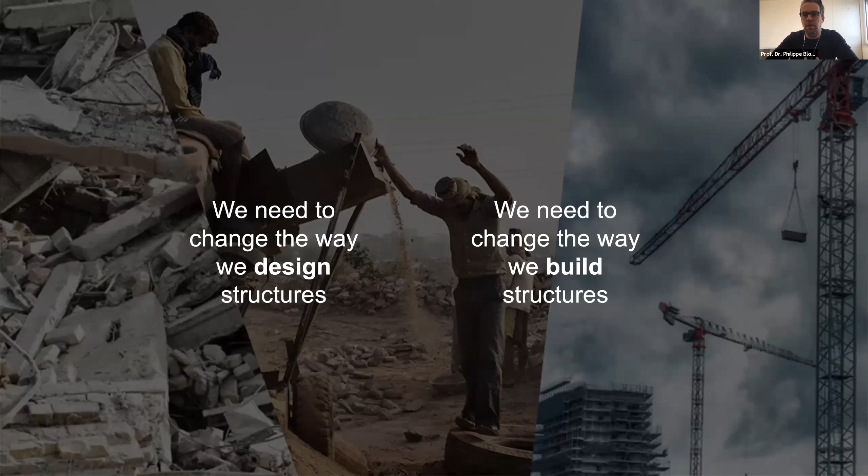So zooming out, national centers are national endeavors indeed that really want to promote long-term research with high risk and high return. Particularly the NCCR Digital Fabrication is trying to really question and investigate to what extent computation, the integration of digital technologies, can really disrupt architecture and construction indeed.

We started in 2014. We work in phases, so currently we're finishing the second phase and are getting ready to start our third phase in 2022, so to go all the way to 2026.

The leading house is ETH Zurich, but all key institutions and many of the universities of applied science in Switzerland are collaborating on this massive endeavor and challenge that we're facing. What's really nice about our NCCR is that we managed to gather experts in all fields that we consider key to tackle these challenges.

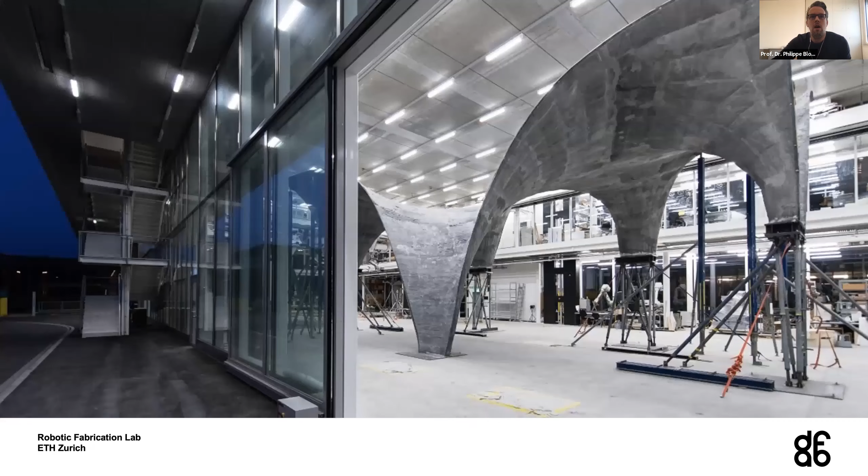There, more specifically, we're in the Institute of Technology. This is our building. It's called the Arch Tec Lab, which has a quite unique roof. The roof is actually robotically assembled. It's actually a prime example of scaling up research.

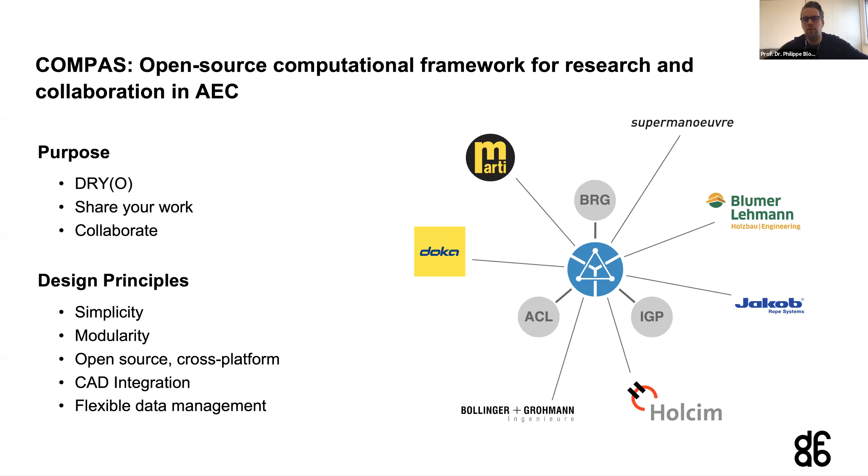And then last but not least, this is Grand Challenge 4. We are thinking about digital collaboration and how, through COMPAS, we can learn from what we do, but also fully understand the socioeconomic impact of all the technologies being introduced. We are a large group of researchers keen to work with all of you. That's the Digital Fabrication NCCR.

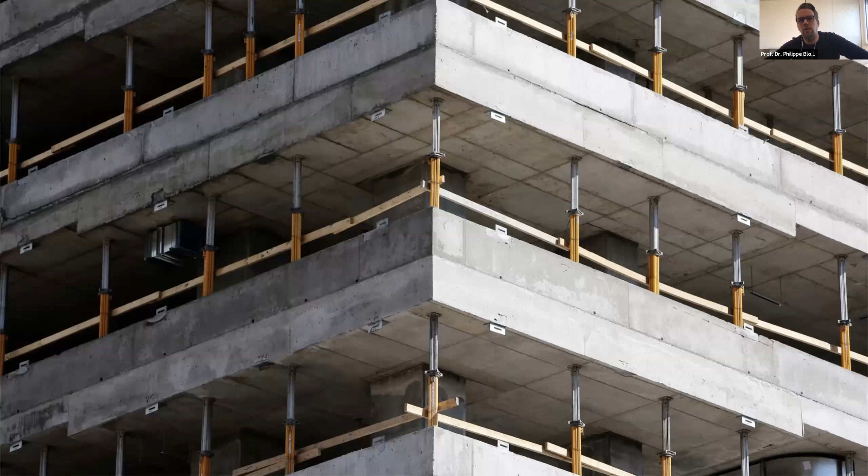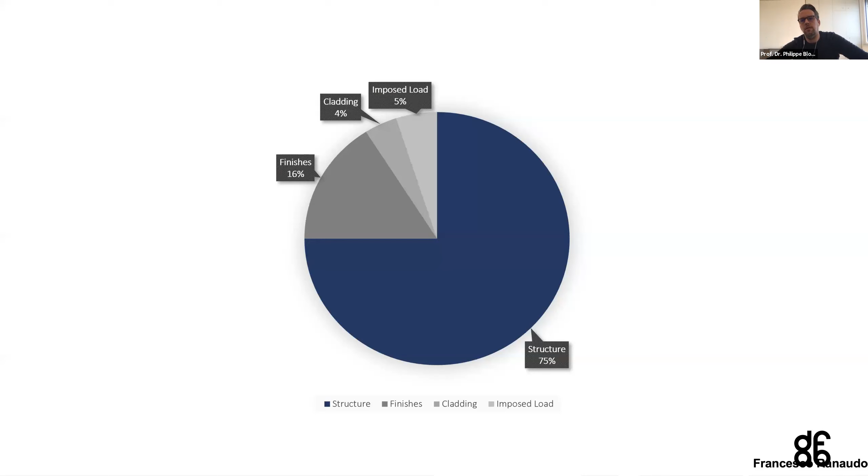Now, maybe 2 minutes to give insight on one project from my own research group. We're trying to tackle the most wasteful structural element in construction, which is the floor. Did you know that in medium high-rises of 15 to 30 stories, like you see all over China, 75% of these buildings' weight is in the structure, and more than half of that weight is in the floors.

So what we do is bring back historical principles of compression to significantly reduce the mass and volume needed. These principles are not new, they come from historic structures. That allows us, for example, in a 5 by 5 meter floor plate, to only need 2 centimeters of unreinforced concrete placed exactly where it needs to be.

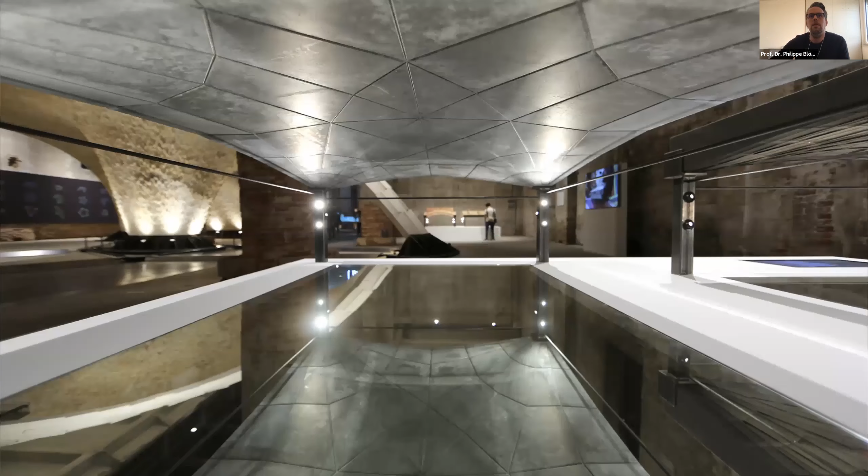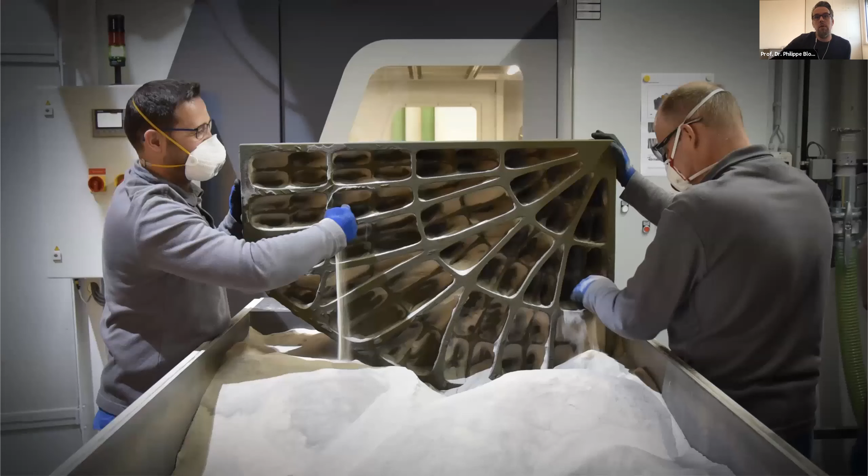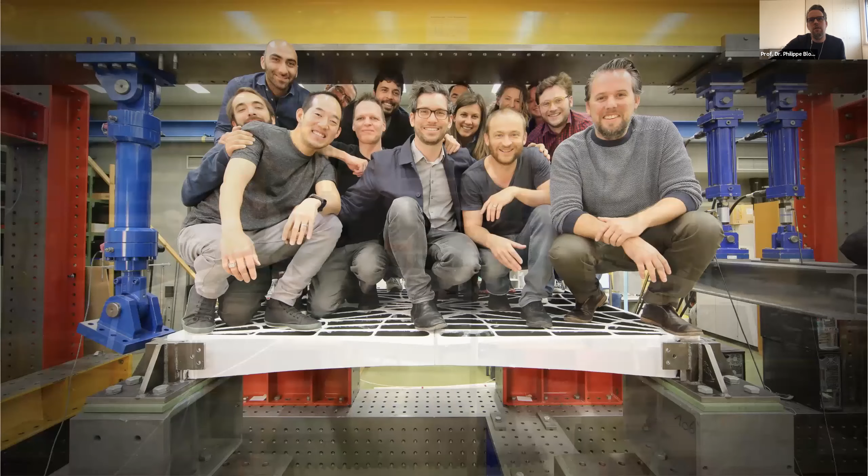This is where digital fabrication becomes extremely important, because in order to shape these non-standard structural geometries, we need new ways to fabricate them — for example, direct 3D printing. In this case, this sand 3D printed floor serves as a large-scale prototype to show that with super weak, simple, low embodied energy, low pollution materials, we can generate a floor that is structurally stable. If you don't believe me, this is 1.5 tons of ETH nerds standing on a very thin 2 centimeter structure.

The reason we do that is indeed to reduce volume, but most importantly to reduce the embodied carbon, to use as much recycled content as possible, and to be 100% recyclable at end of life if you don't just reuse the building.

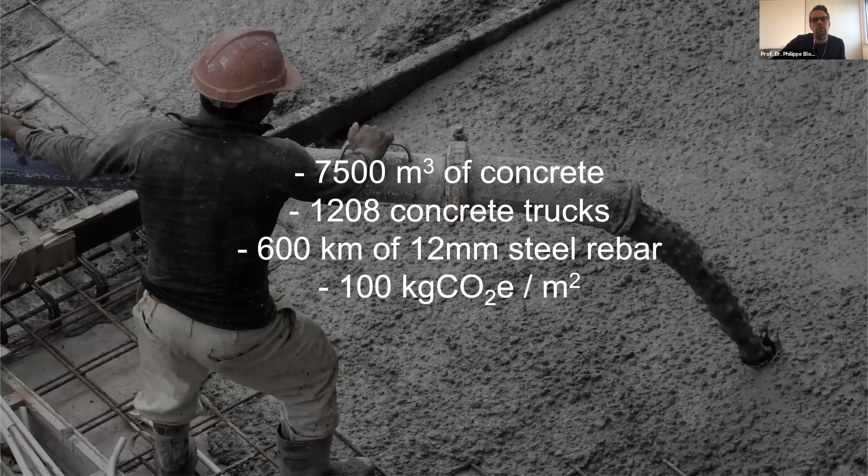What's exciting is that if you apply this to any of the medium high-rises around us, this would reduce the amount of concrete needed by 7,500 cubic meters for one building. Equivalently, this would mean 1,200 fewer concrete trucks needing to go to these building sites. So that's why we're excited about pushing these small innovations.

What is more boring than just a floor that we all walk on? But if you know that all these floors together amount to more than 40% of the mass and weight of these buildings — so 40% of the pollution — then I think it's worth questioning how we build, and introducing digital fabrication to do significantly better. So with that, my short introduction. I look forward to this discussion later, and thanks again for this opportunity.

Thank you, Professor Bloch, for the interesting talk.

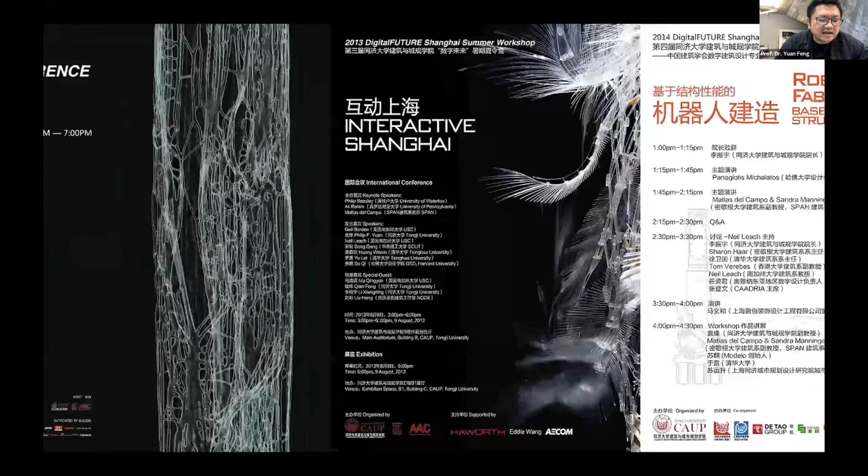In the past 10 years, we have successfully invited a number of prominent educators from the leading schools of architecture and architecture associates to join and contribute to the series of events.

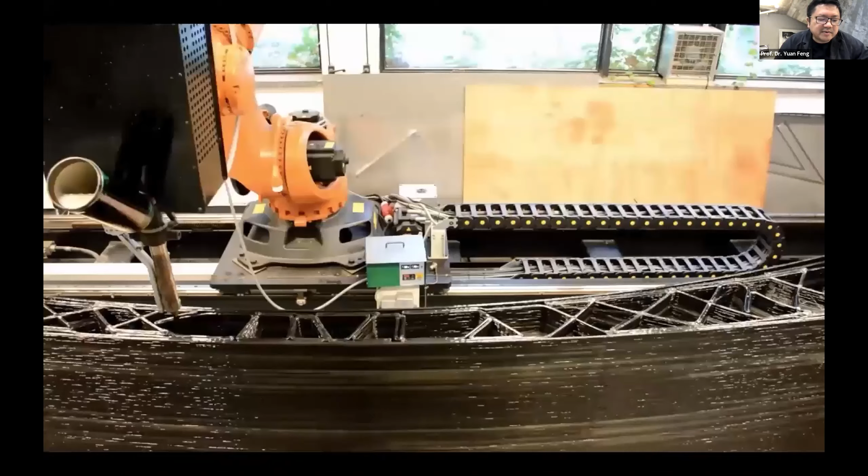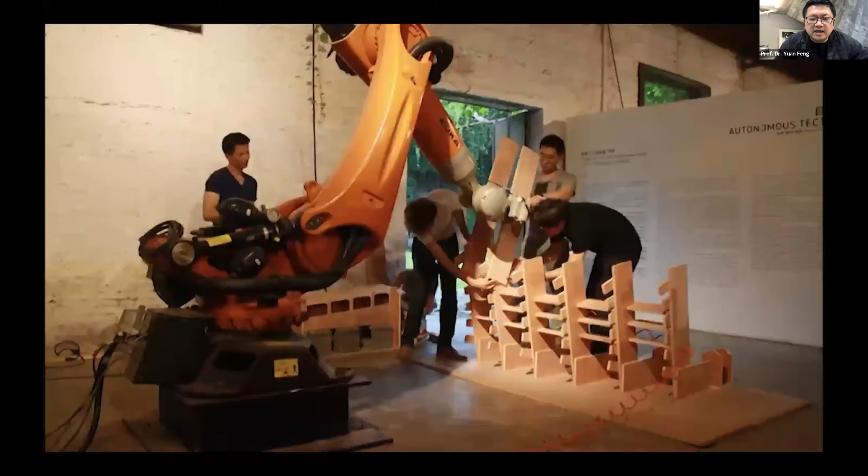Every summer, we had an exhibition to showcase the outcomes of the workshops. Here is a glimpse of all the installations, artworks, experimental prototypes, and exciting projects which the Digital Futures series of workshops has created. I think it's quite diverse, a dialogue cross-country, and also a very meaningful process for everyone to learn from each other.

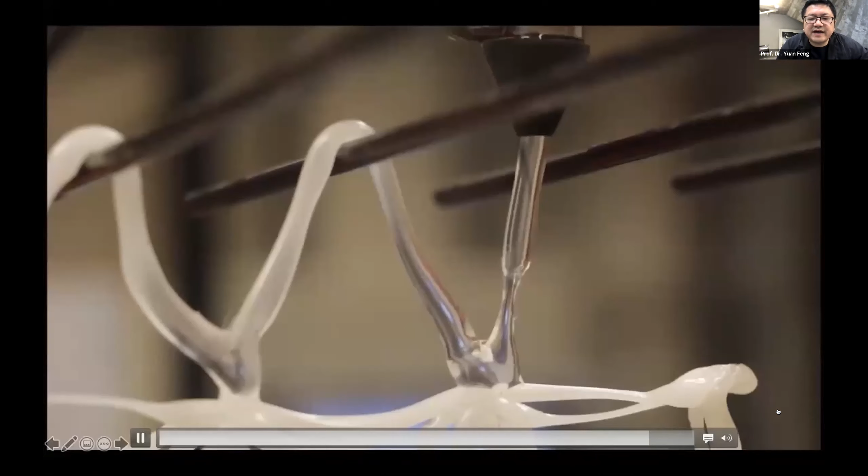It's quite cross-discipline, including fashion design, material science research, computational design, and digital fabrication as well.

Digital Futures launched with a manifesto calling upon leading architects and architecture educators to give their time for the benefit of everyone across the globe. The response was astonishing. Educators from leading architecture schools in the world came together in a gesture of solidarity to offer students from all over the world, including those unable to afford the fees of the top architecture schools, the kind of educational experience that otherwise they could only have dreamed about.

The initiative was highly significant for many reasons. Not only did it succeed in showing that online workshops could be as effective, if not more effective, than face-to-face workshops, but it also made a significant step in helping break down the walls of the classroom and democratize teaching in different ways, especially in architecture education.

Here you can see the statistics of the number of applicants from the year 2011 to 2020. It is obvious that Digital Futures had attracted progressively growing numbers of applicants throughout the world. Last year, the applicants reached their peak.

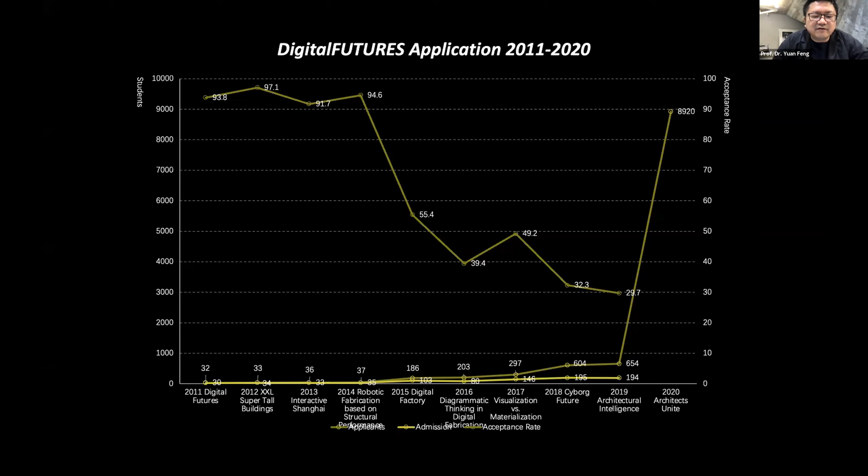Despite the pandemic, it has been quite possible to conduct Zoom meetings, to use contactless payment, and order groceries online. The new situation pushed people out of their familiar habits and forced them to adopt a new digital lifestyle.

Digital Futures has an education platform linking universities and institutions around the world. The initiative has expanded its partnerships and maintained long-term collaboration with a number of leading institutions, including ETH Zurich, IAAC, University of Stuttgart, Harvard GSD, MIT, SCI-Arc, RMIT, AA, UCL, and so on.

Over the past few years, we have had a lot of outcomes, including publications, and Digital Futures gradually grew in status. A series of books was published as part of the Digital Futures event, parallel with the event. We co-authored these with Professor Neil Leach, Professor Achim Menges, and Professor Philip Beesley, and this sequence of books has actually educated a generation, helping them learn or engage with computational design and robotic fabrication culture.

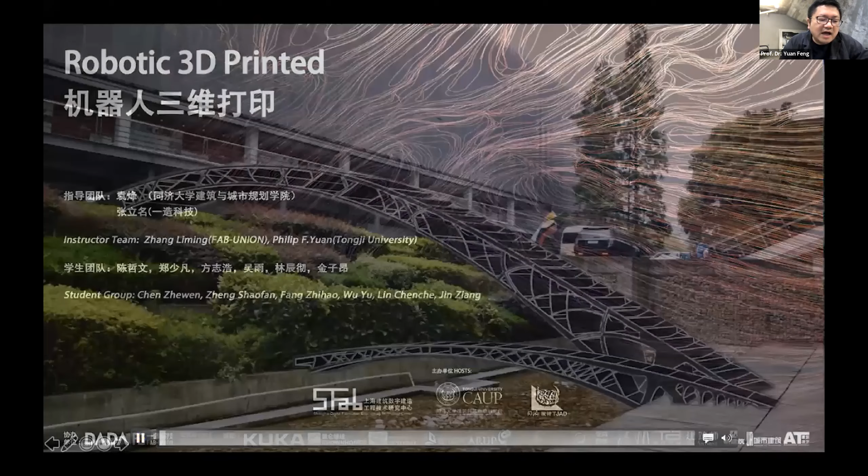By the end of this presentation, I would like to show our 4 different research projects from my team that supported our research process. Since 2017, the pedestrian bridge has been our team's prototyping object, testing different materials integrated with novel fabrication technologies.

In 2017, we experimented with 3D modified plastic printing technology, testing it in our school from the ground floor to the basement, around a 40 meter span, and in a small village around a 6 meter span. It was totally made by plastic printing, around 1.5 tons, and can stand 5 people on it.

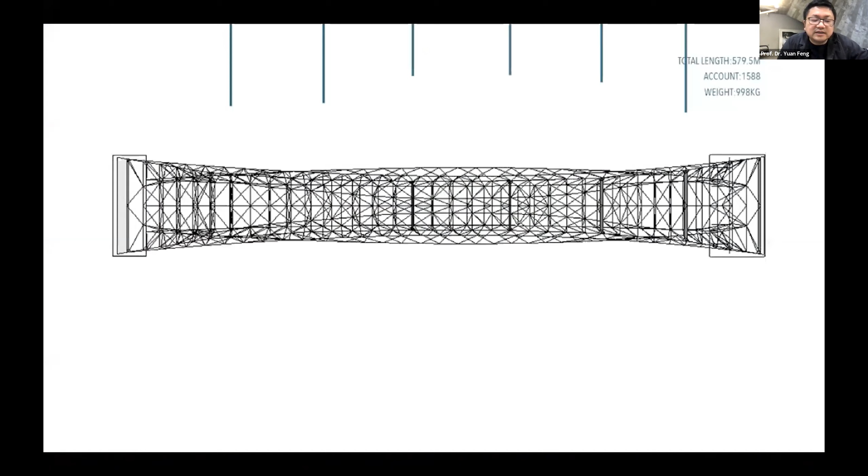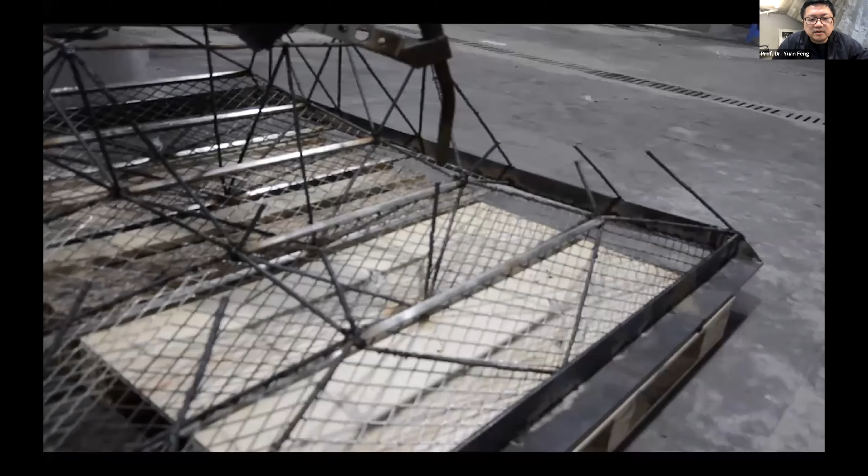The second year, 2018, we tried wire arc additive manufacturing technology with steel. It was designed with different components, welded by robotics point by point. This is the welding process by the machine. From 6 different parts, we assembled them on site. In the second year, we could stand 7 people on this 1,000 kilo bridge.

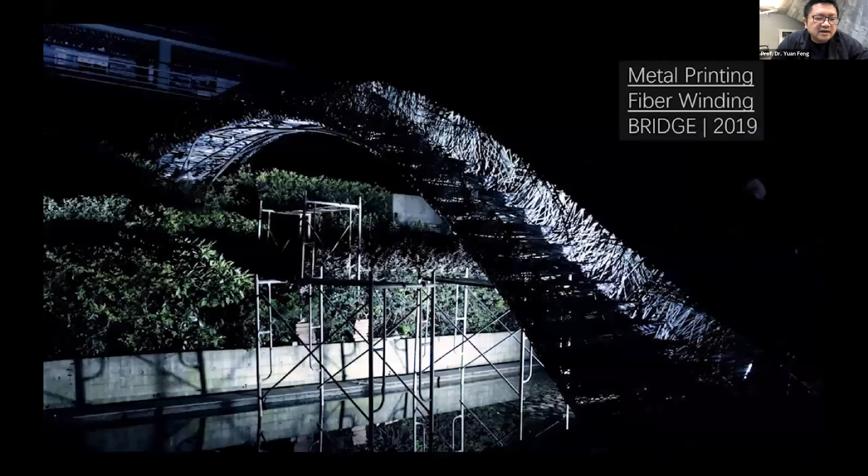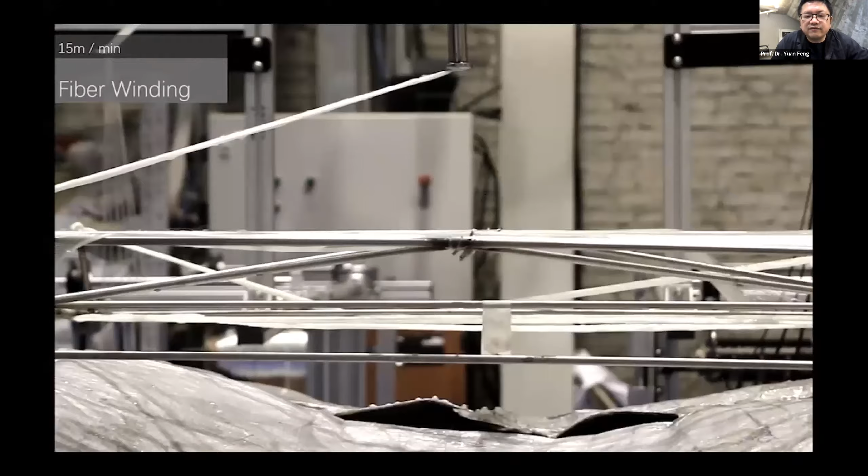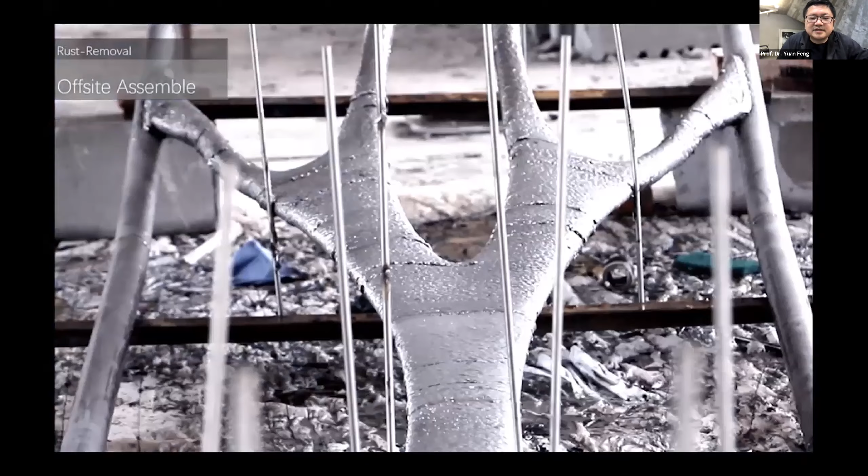Then time goes to 2019. It was our first attempt at a hybrid approach, combining metal 3D printing and fiber filament winding technology, including carbon fiber and glass fiber, which showcased compression and tension, different kinds of forces on the same bridge. Everything is done by the students. I think it's a learning process from computational design and robotic fabrication, finally leading to the assembly process.

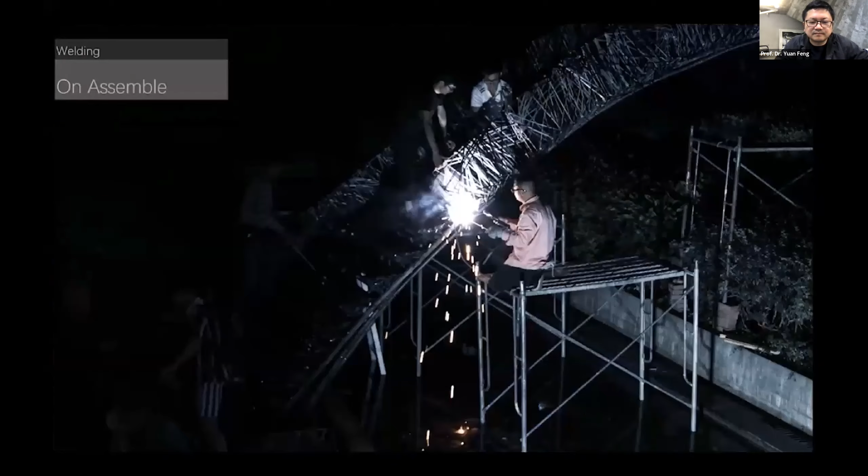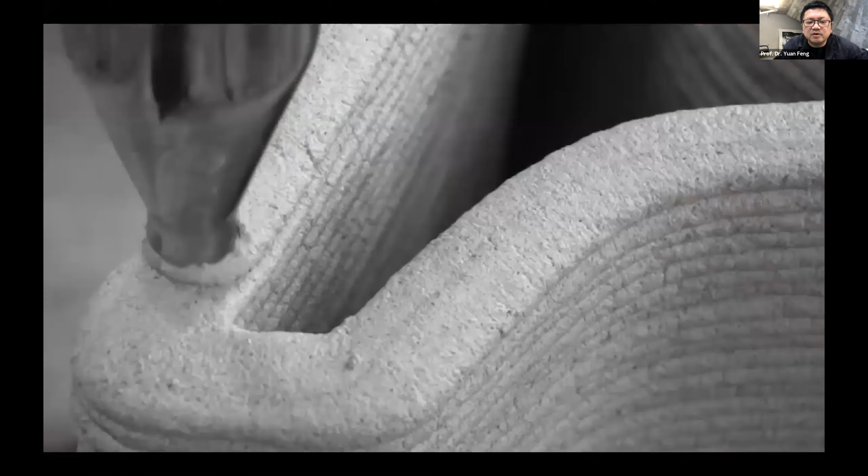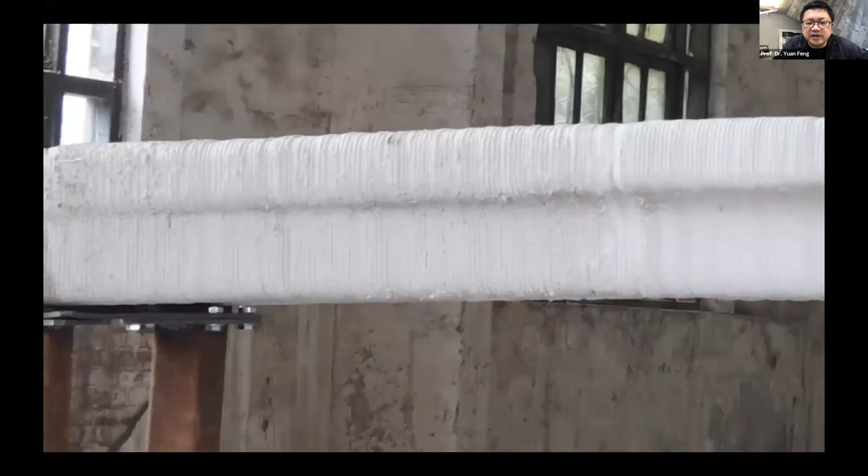That's a brief introduction to what my team engaged in over the last 3 years. Last year was a little bit influenced by COVID-19, so we made a smaller bridge using 3D concrete printing. Most of the students were online; only 4 or 5 team members stayed in the factory working on this 3D printing process. But it was a good test with the learning process, engaging with material performance and learning how to generate different forms using different tools.

So that is my speech. I'm looking forward to the discussion after the keynote speakers. Thanks a lot, and I'll give the floor back to Libing.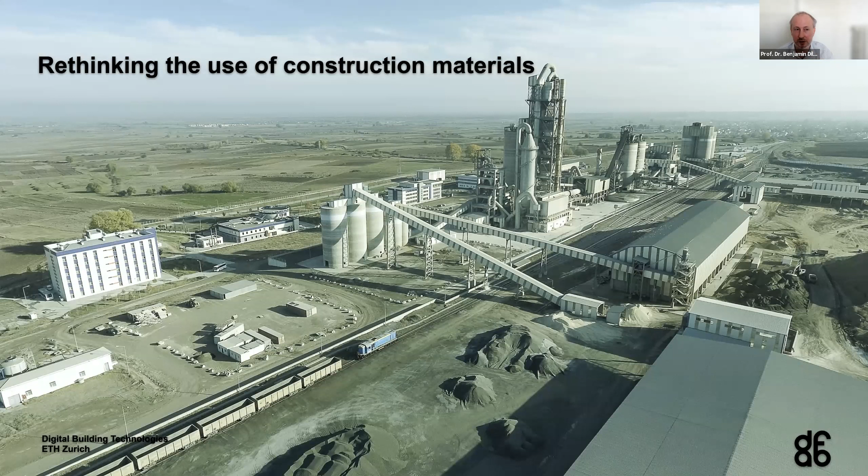As Philip mentioned in his previous talk, we have to rethink the use of construction materials. We also should rethink the way we fabricate buildings, rethinking modes of prefabrication and on-site fabrication to avoid a monotonous architecture that isn't accepted by the population. And we should rethink building elements. Can we move beyond industrialized, standardized fabrication methods? How can digital fabrication methods influence our building elements?

We can look at examples from highly optimized elements like we know from the car industry. But of course, there's a big difference: cars are manufactured millions of times in the same way. The big challenge for us is, can we manufacture buildings with the same precision and optimization routines, but in a non-standard way?

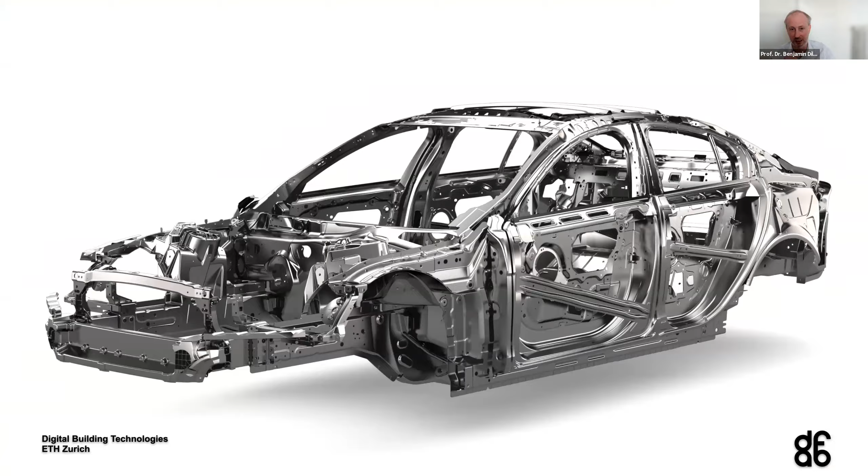Can we use fabrication methods as we know from the car industry, for example robots, to bring to architecture an automated additive manufacturing method, fully harvesting the potential of completely digital manufacturing routines? Our research is hosted in the NCCR DFAB, the National Competence Center of Digital Fabrication, and our laboratory is the Robotic Fabrication Laboratory, a very large-scale 3D printer with the ability to print with 4 different robots on the same part.

The research of my group focuses on large-scale additive manufacturing and related computational design work, and we focus on what we call element-oriented design research. We want to really rethink building elements.

I'll show in the next slides examples of 4 different key aspects. Our motivation is to allow a higher degree of differentiation in architecture, to dematerialize architecture by using material more strategically, to increase performance including operational energy performance of building components, and to make architecture with this higher quality more affordable.

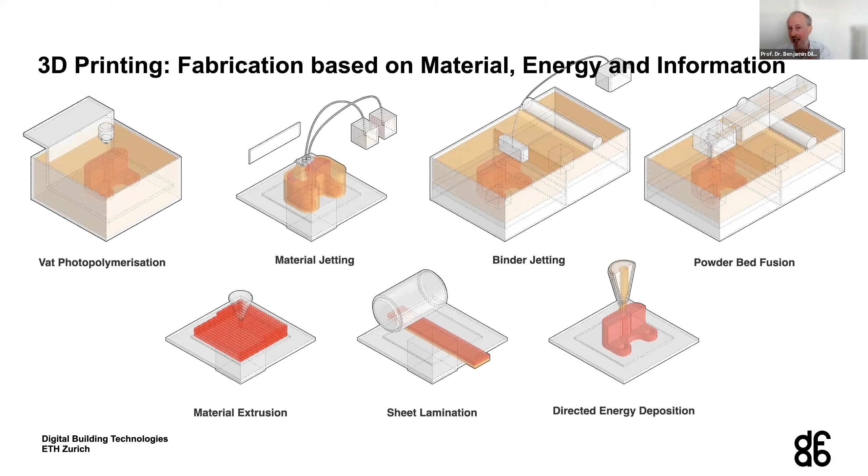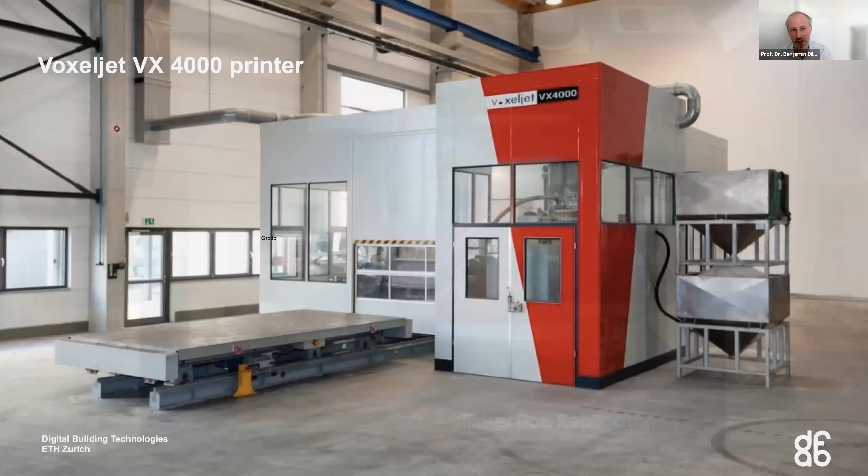On the example of differentiation, I'd like to show a work we did for an exhibition in France. In architecture offices and other disciplines, we know small-scale printers where the energy is temperature. We also work with very large-scale printers like this binder jet printer, where the energy brought in is chemical, from a glue that binds loose sand together.

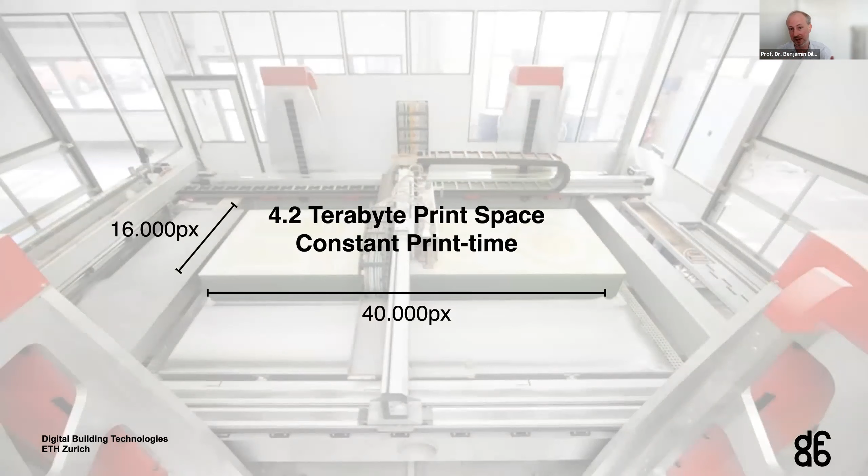What's spectacular about these printing processes is that they already reach architectural scale, 4 by 2 by 1 meter, printable within 48 hours at high resolution—roughly 10 to 100 times more than the screens we're looking at right now. So 16,000 by 40,000 pixels in every single layer can be manufactured and differentiated.

That allows us as architects to fabricate highly bespoke, highly differentiated elements—in this example, an ornamental structure on the outside, but also on the inside. No single brick has to be the same. Walls and inner structures of these bricks can be totally adjusted to the specific load case and handling scenario.

Using additive manufacturing in a robotic way means complexity is no longer a challenge in architecture—it's out of the equation when it comes to affordability. Fabricating simple rectangular boxes is not any faster than fabricating the intricate geometry we exhibited in France.

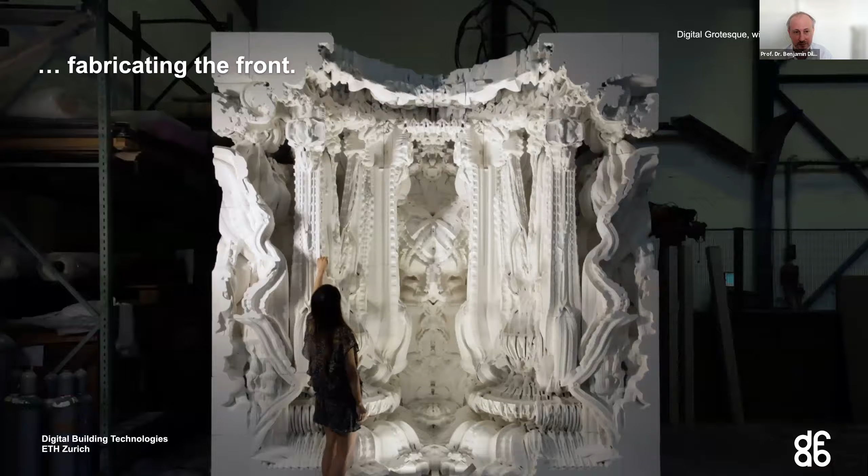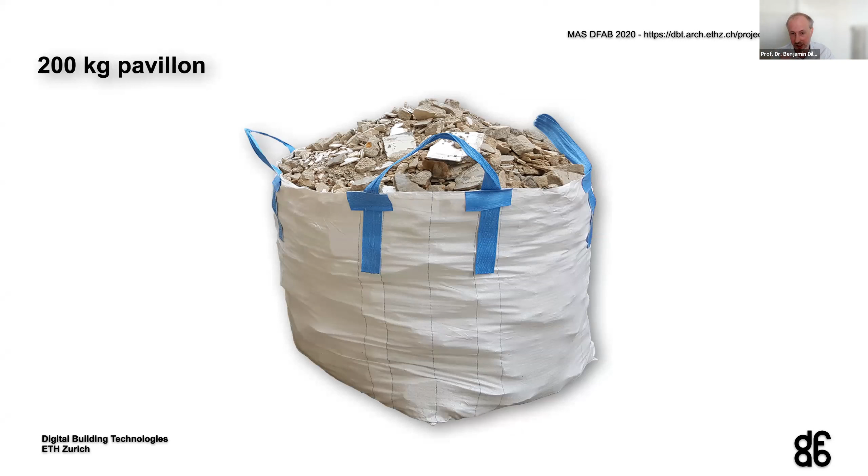Secondly, I want to highlight the potential of additive manufacturing for dematerialization. Here's a student project where the ambition was to create an entire pavilion with over 40 square meters of roof structure, with a weight of just 200 kilograms. Here you see, as a reference, 200 kilograms of building waste.

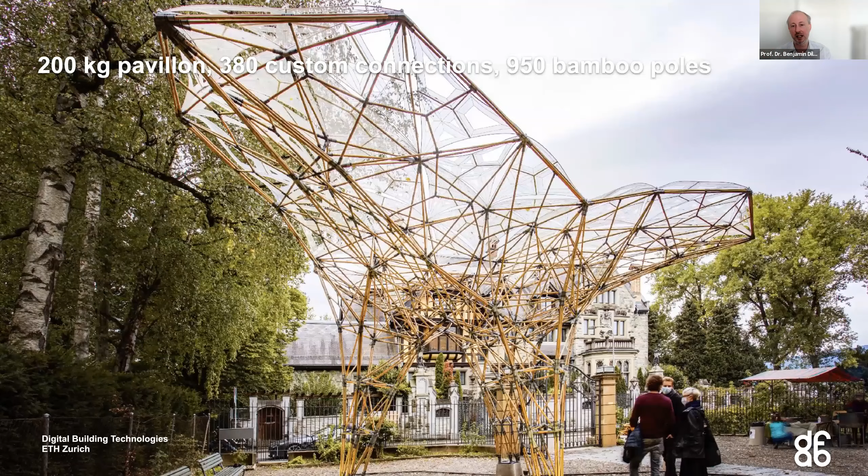We used 3D printing on another scale to print over 380 individual joint connections—a mixture of nylon printed joints and a key joint directly 3D printed in metal. This allowed us to combine these highly sophisticated joint elements with bamboo as a lightweight building material, creating this large-scale, 200 kilogram heavy—light—pavilion.

Thinking of other lightweight structures, as Philip mentioned with the example of this slab, increasing performance and making forms more specific to a task, more lightweight, often results in more complex geometry—like this lightweight bone structure of a bird, which would be very difficult to fabricate with traditional technologies.

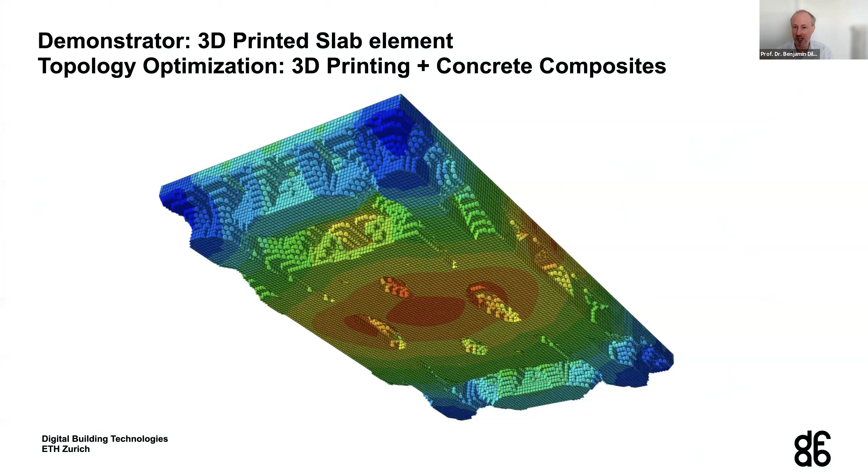So in a prototype of a slab, we used 3D printing to create this topology-optimized structure, where the computer helps us take material out of the element where it's not needed anymore.

Those are slow processes, and it's really difficult to fabricate those elements, and 3D printing might be the key to introduce these kinds of optimization routines in the design process. However, to allow a very direct design, we introduced a machine learning approach that lets the designer directly play with these optimization routines. Here you see real-time predictions of optimized structures using machine learning, allowing an intuitive optimized design, which can then be sent to the 3D printer. You see here a small scale 3D printer that would allow printing those elements within just a single hour. In this example, we reduced over 80% of the material, and at the same time created voids in these slab elements, allowing us to integrate infrastructure in a very compact way.

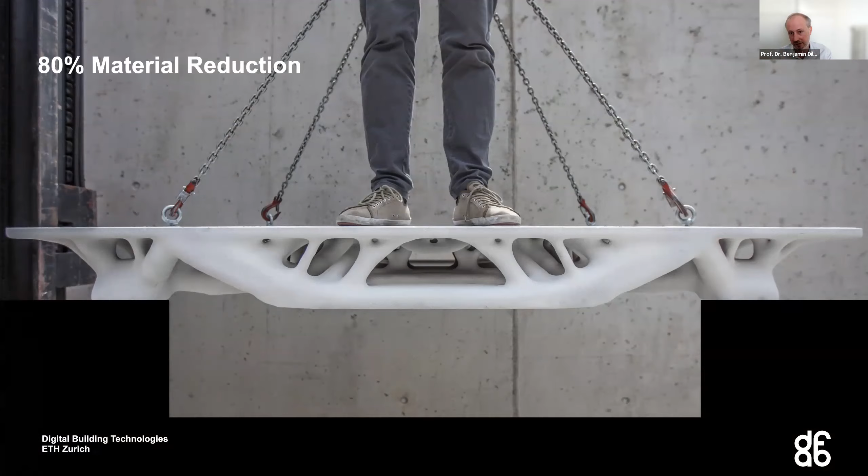Here, a similar picture to what Philip showed, but with a smaller team. Now we would not fit anymore on this element, but you see that this one can also withstand a certain mass. Lastly, I want to talk about performance.

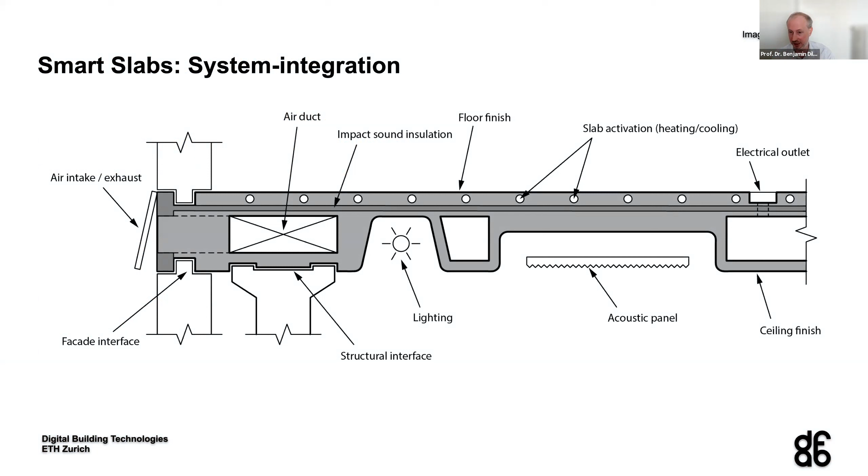Using digital fabrication methods doesn't always mean reducing cost, but could also mean increasing the level of functionality, a higher value of each building element. In the smart slab example in the DFAB house, we tried exactly that: designing a prefabricated building system that integrates many different functional layers, starting from lighting integration, material reduction, making it more compact to save floor or increase usable floor height, and even integrating acoustic and optical structures into the structure.

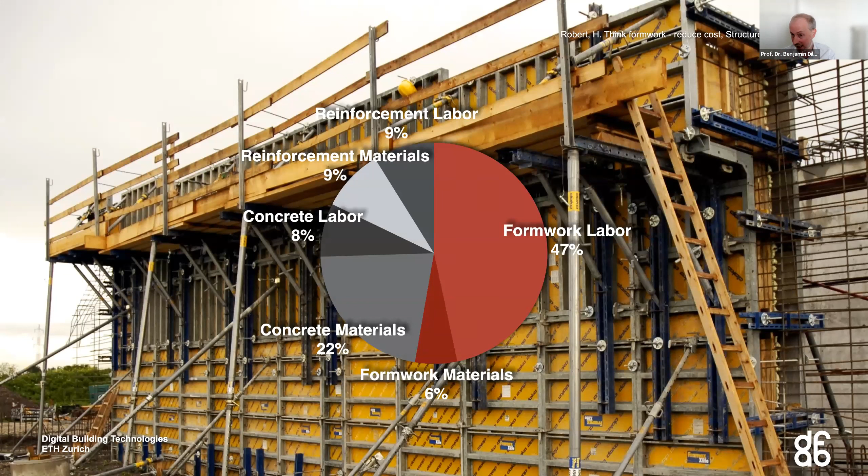We identified formwork cost as the main cost driver of these complex building elements, and we used additive manufacturing to actually 3D print the formwork, which was then combined with a high-performance concrete structure. You see here an example of a digital formwork system consisting of many individual parts that can be brought together in a simple click-and-play system.

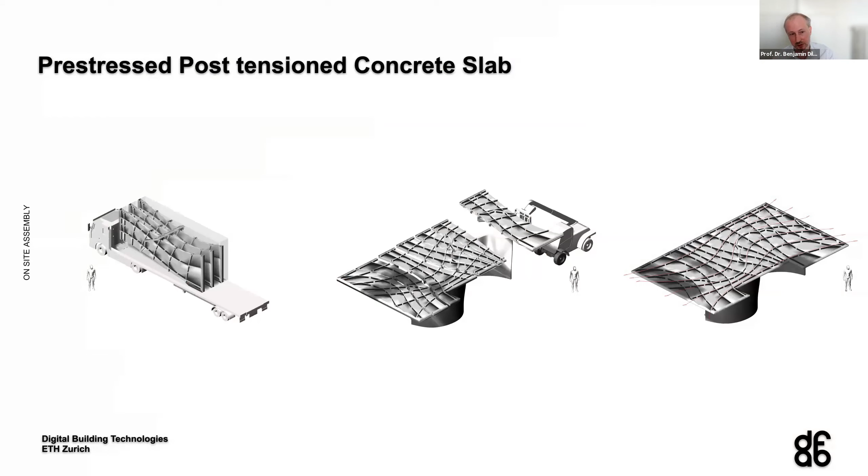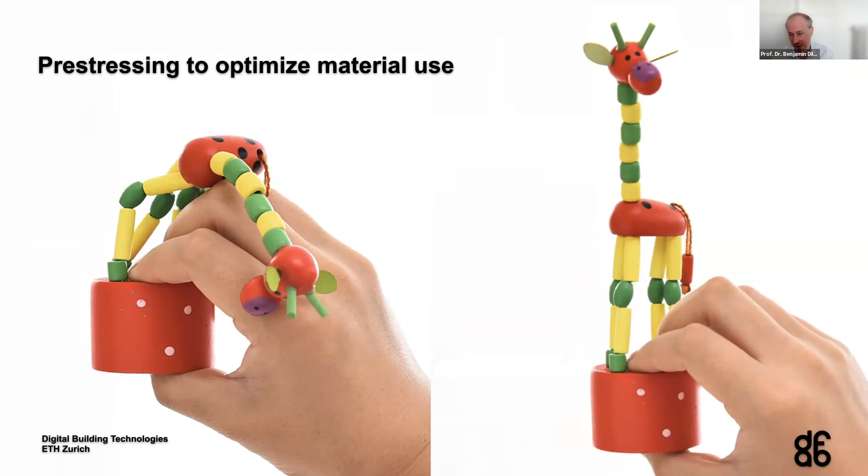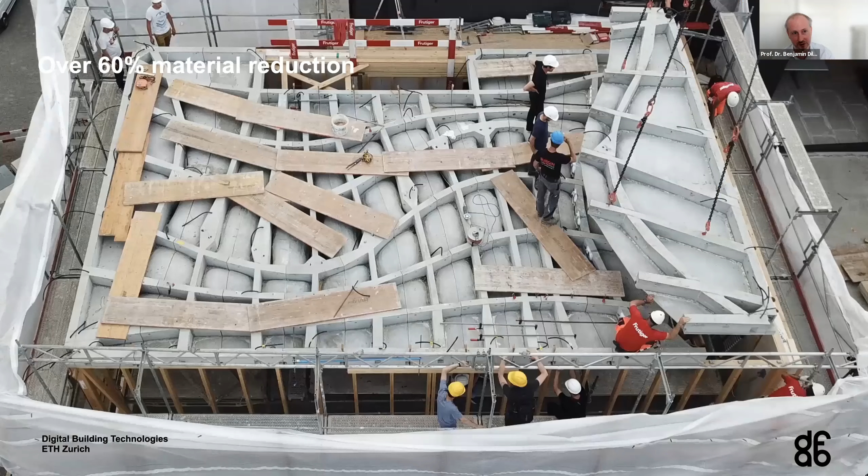The structural assembly of these concrete elements is much more precise compared to traditional fabrication methods, combined with another strategy to reduce material through pre-stressing, facilitated by 3D printing adjustment details that allow very precise pre-stressing. You see here the slab assembled with a precision of less than 2-3 millimeters on the seams, installed in a very short time on the construction site, helping us reduce a dramatic amount of material.

The conclusion of this project is that in this case, it is strategically optimal to use 3D printing as formwork because we can combine it with high strength concrete. We can also reuse the formwork, which we tested several times.

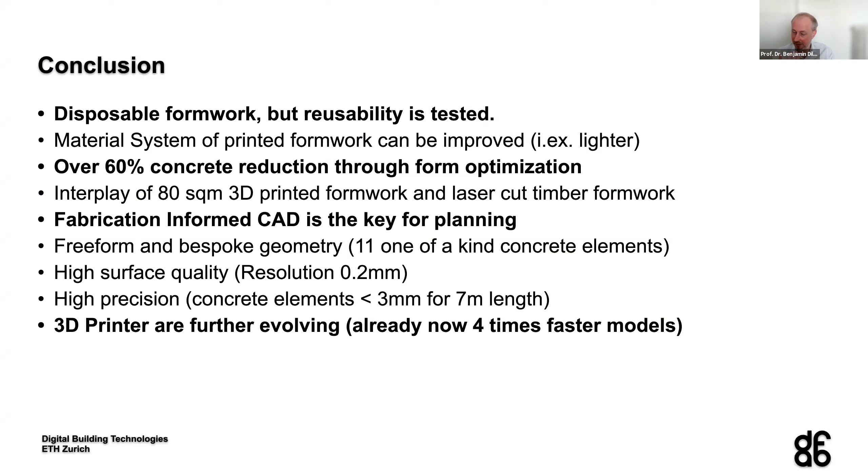But it's also important to understand that 3D printing is a very new technology. Over the development of the projects I showed, these methods developed very fast and became 4 times faster and 4 times cheaper to apply in architecture.

Lastly, I want to conclude with where I see the potential of additive manufacturing in architecture. Additive manufacturing could be the closest connection between design and its materialization, as we've seen in the examples Philip Jan showed. It relates very well to construction because we should ideally see every single building as a prototype, with building elements only required in small lot sizes. Differentiation and customization turn from a challenge to an opportunity when using 3D printing.

3D printing can play many various roles in architecture. I've shown examples of large-scale printed elements and small-scale joints. Further research is needed, relating well to the next conference topic: material intelligence. We need to learn to manufacture more sustainable material systems. Showing these examples of bricks with an unseen level of differentiation, reduced material use, connecting sustainable materials together, and increased building performance, I think it's an exciting time to use additive manufacturing to rethink future bricks in architecture.

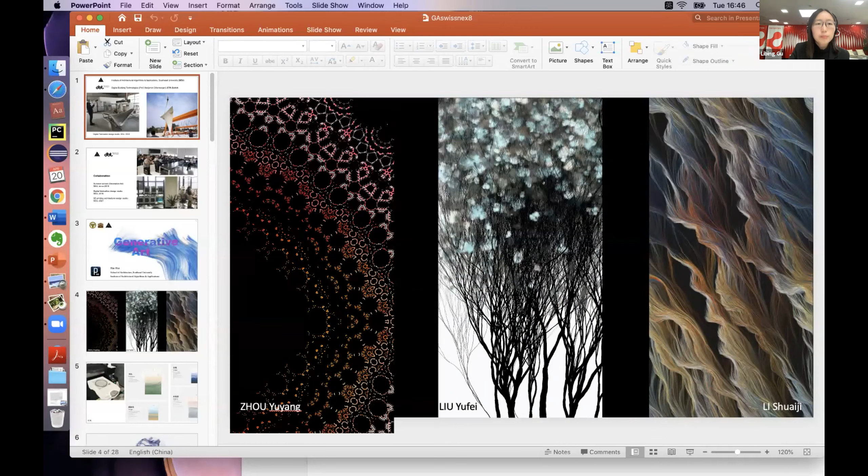Good morning and good afternoon, everyone. Thank you, swissnex, for this invitation. In fact, Southeast University has been in collaboration with Professor Dillenberger since 2018. He frequently visited Nanjing to our Institute of Architectural Algorithms and Applications.

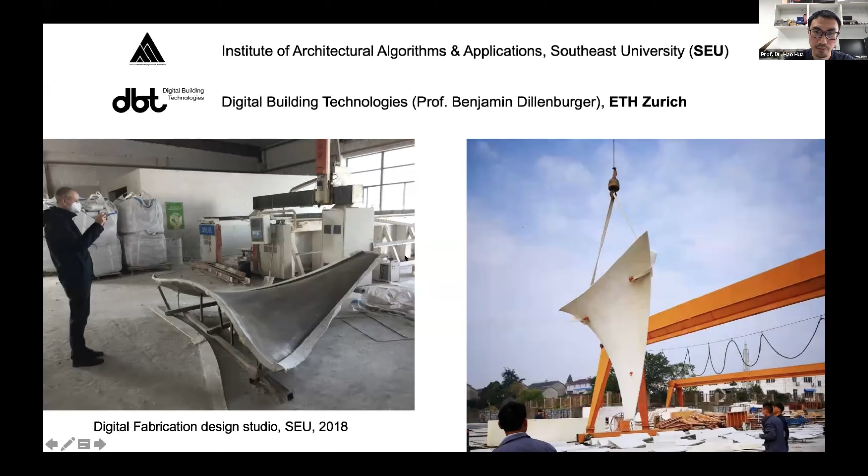Here the images show our design studio of digital fabrication of thin shells. The Chair of Digital Building Technologies and our institute organized workshops and lectures at Southeast University. For example, we taught the summer school on generative design in 2018. Benjamin taught Python in Grasshopper. And this semester, Benjamin and I are holding design studios on 3D printing architecture, which I will talk about at the end.

Today, I will show our works on generative art. It's about transforming codes to graphics and geometry. Processing is a flexible software sketchbook and a language of coding for visual arts. We often use processing to explore design ideas. Both scientists and artists found their interests in generative art. As an architect, I would like to reveal its potential in design and digital fabrication.

I organized the summer school every year at Southeast University. The students learned programming from scratch. After 2 weeks, they can program such fractals, L-systems, or swarms. They also produce animations, which you may find on YouTube.

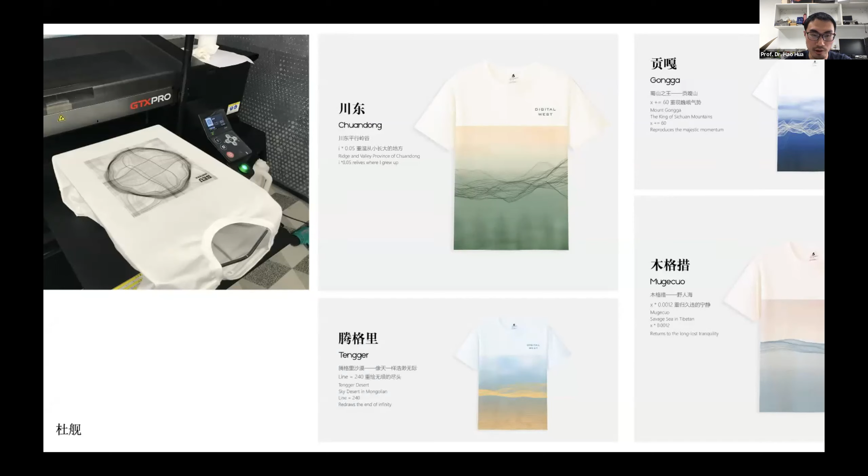Last summer, I discovered a t-shirt shop having such a printer. So you can simply send an image to customize your own t-shirt. I let every student design and wear their own t-shirt. Each only costs about 70 RMB.

This project used processing to create sensational textures for planets in our solar system and apply them to soft drink bottles. So imagine if the bottle, the letters on the bottle, and the liquid are dark, then you cannot see the letters until you drink up the bottle.

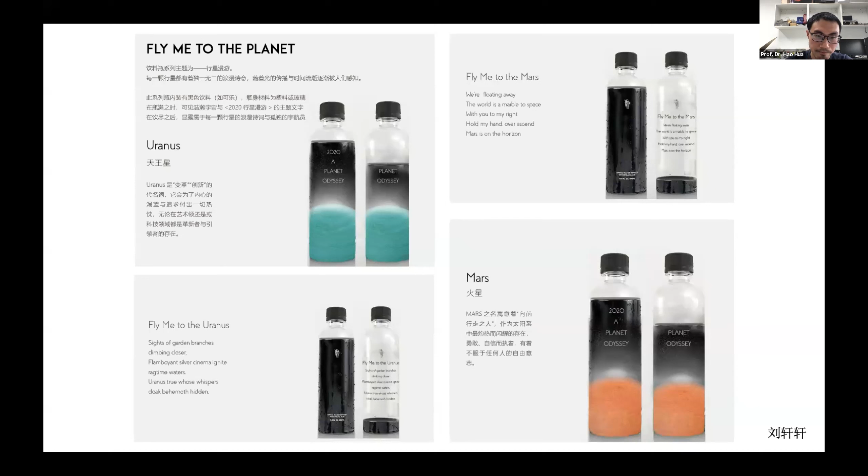I'm often amazed by the organic shapes in nature. They come in a great many varieties, but you can simply see the symmetry in them. To make a silhouette sculpture of jasmine, I tried to perceive the organic form from the machine perspective and from a human perspective.

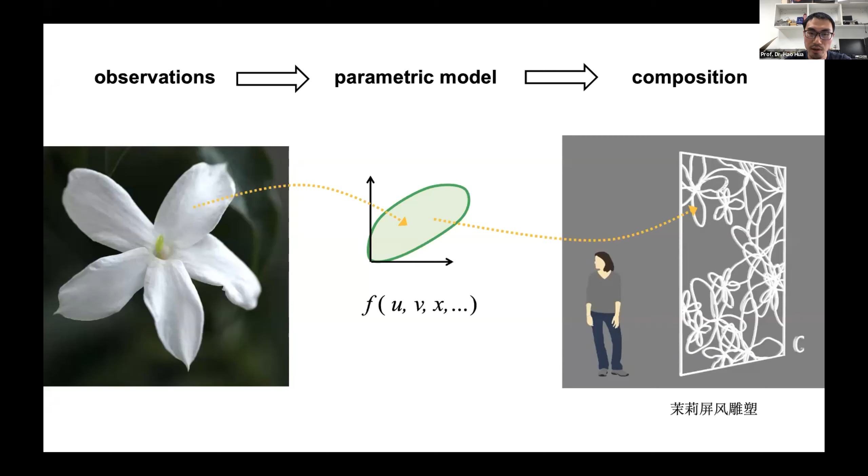One can train a parametric model with observations. Here the images are the training examples from the machine perspective. Once the parametric model is established, a designer can create compositions of them for the sculpture.

But from a human perspective, we prefer rough resemblance to precise fit. Equipped with a parametric organic shape, we create a program to generate many layouts for the silhouette sculpture.

Actually, in some Chinese paintings, part of the object is outside the frame, so people can imagine what's outside the frame. So here we also implement such an idea in our layout.

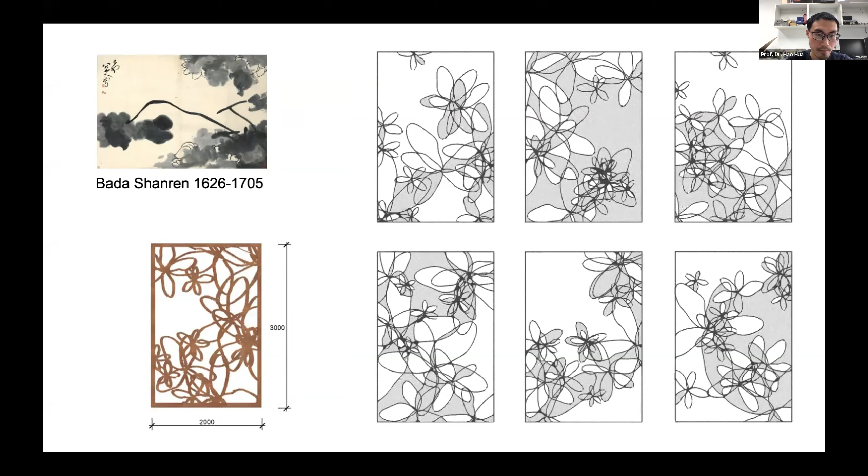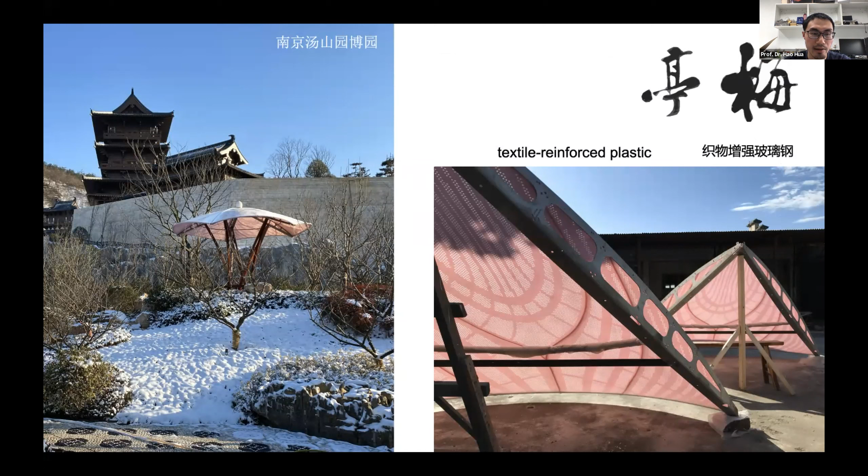Once upon a time, hand knitting was very popular in China, but now people spend all their time on smartphones. We shift from hand knitting to CNC knitting machines so that one can digitally handle every yarn during the knitting process. Then the resin is sprayed onto both sides of the fabric to make a thin shell.

A cellular automaton is a collection of cells which evolves through a number of discrete time steps, according to a set of rules on neighboring cells. We let a cellular automaton run on the fan domain. The result is full of details, and every pixel corresponds to a single loop of knitting.

Because the roof is doubly curved, parallel streamlines cannot fit the entire domain. So we developed a computer program to find the places where you increase or decrease stitches.

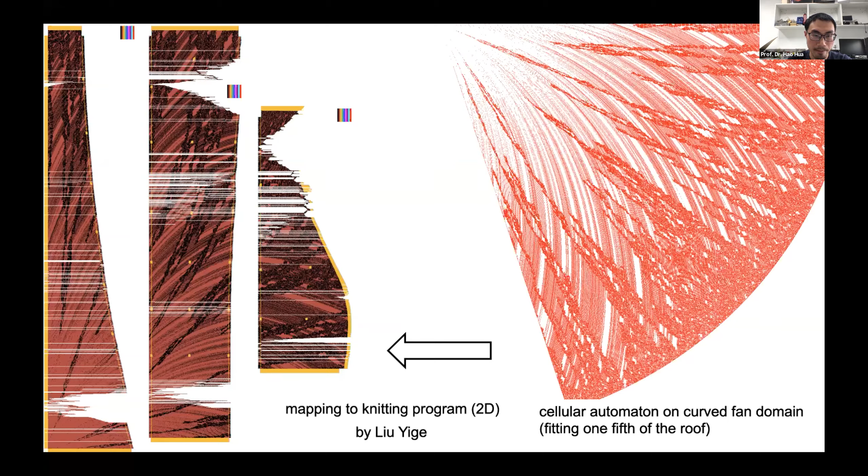Finally, all textiles were fabricated in Shanghai. Then the 5 pieces of the roof were prefabricated in a local GRP factory. On the construction site, the timber frame and the roof were assembled respectively. Then the roof was lifted onto the timber structure to complete the pavilion.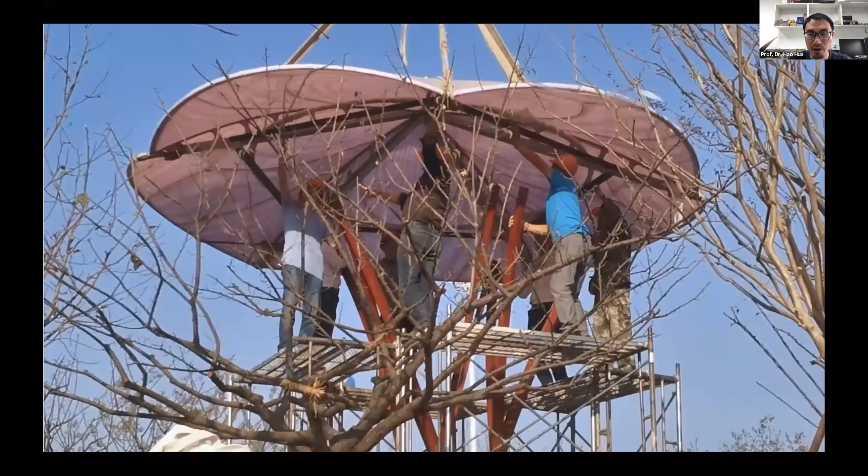Under the pavilion, actually, you can see the sun through the roof because it's semi-transparent.

Generative tools also help us design timber structures. The famous burr puzzle has 6 wooden pieces sharing the same root. It inspires us to connect wooden pieces with bespoke joints. Crystallography, especially the Bravais lattice, is very helpful to handle the symmetry in space frames. We choose rhombohedral to develop such timber structures.

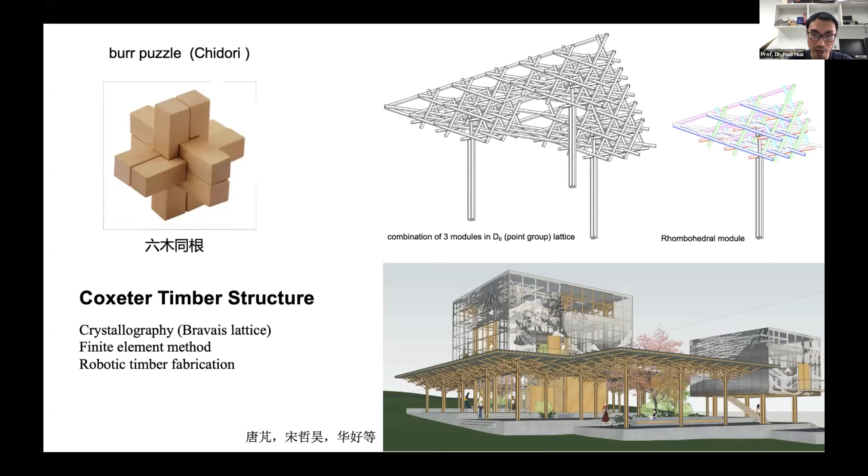Although the burr puzzle hides a complex interlocking mechanism, here we use shallow notches which inform the assembly, so any wrong combination will be easily identified. The shallow notches correspond to the Boolean operations between the dimensional timber, so the robotic toolpath can be a function of the parameters in the Boolean operations.

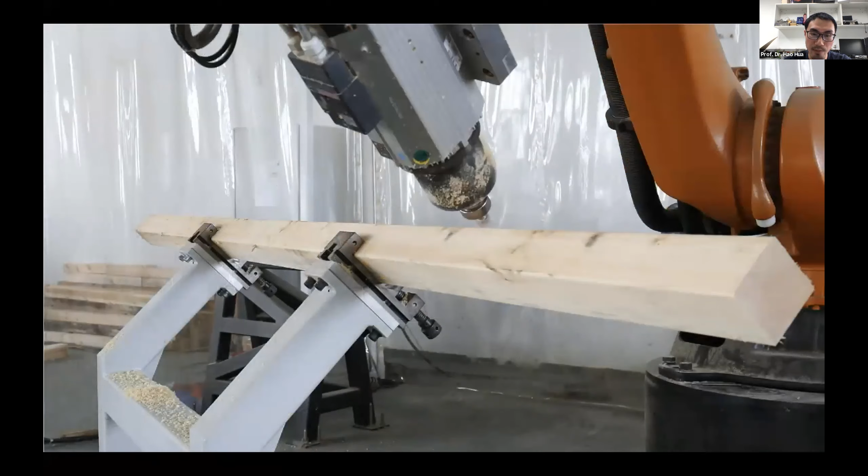We used the Java programming language to create the joint details and the instructions for the robots. The joint design improves the fabrication efficiency and simplifies the toolpath planning. The milling and drilling volume is kept to a minimum, so the final product is still similar to the raw dimensional timber, so the pieces can be reused.

The wooden pieces are connected by semi-rigid joints, so the structure is neither truss nor frame because there are bending moments - it is definitely not a truss. And here, a node unifies the displacements of multiple pieces, but it does not unify the rotations of the multiple pieces, so it's not a conventional space frame.

We use the direct stiffness method to analyze the structure, and it leads to an underdetermined system. Very recently, we found a systematic solution to this problem.

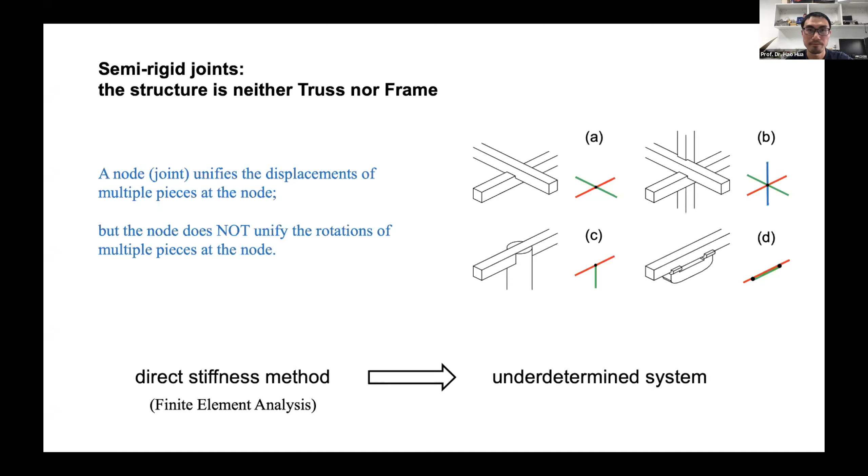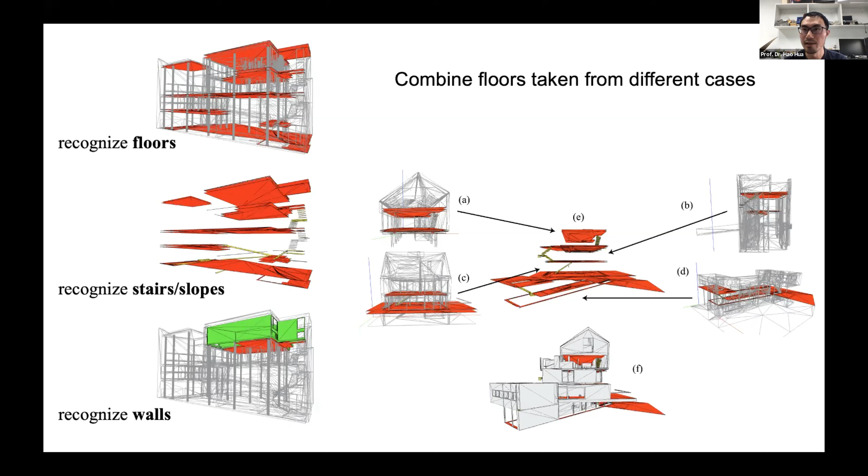When architects design buildings, sometimes they learn from previous cases, and generative design methods can help us collect, analyze, and recombine previous cases. If you download models from the internet, the architecture model usually consists of triangular meshes, so there is no architectural information. So first we write a program to recognize essential structures like floors and stairs.

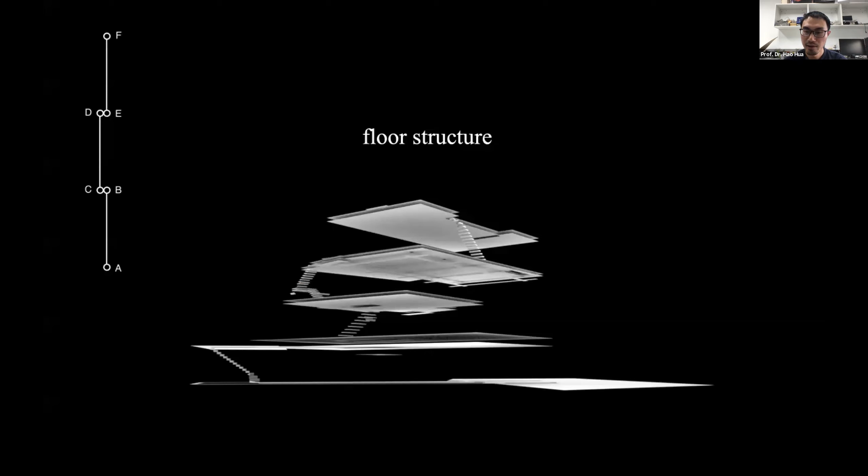Then the computer can combine these structures to make a new design. If you tell the computer to stack the floors vertically, you get such a design - here is the skeleton, and this is the full building. Somehow it looks like it was designed by an architect, and you can specify more complex floor structures and the computer will not fail you. Actually, the good thing about a computer is it can quickly generate thousands of solutions for you within a second.

I think in this special case, the relationship between a computer and a designer should be reconsidered, because here the computer looks like it is being creative based on the generative design method.

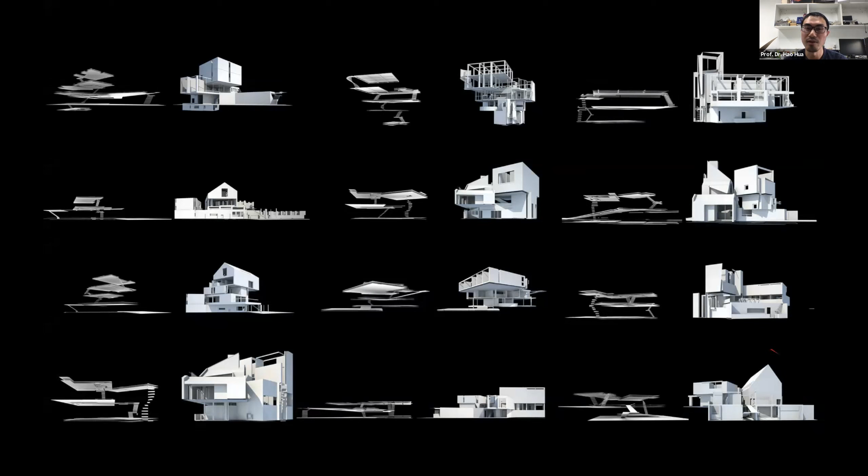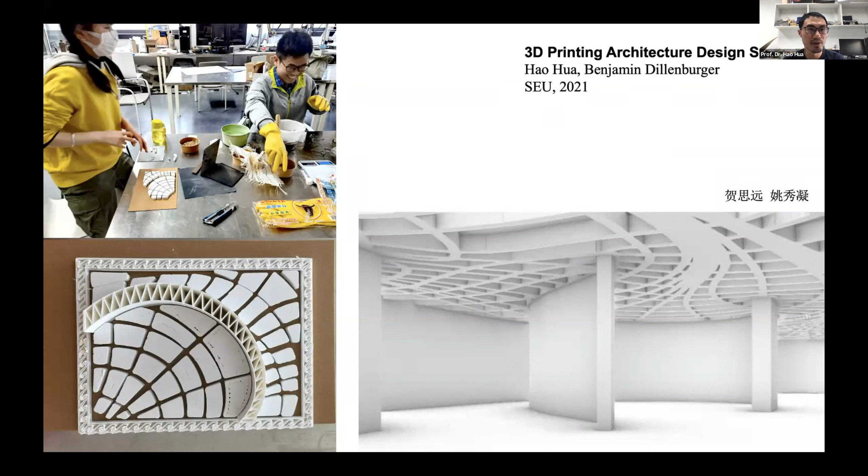Now the students are making the prototypes, and they have also tried building these tubes - first printing the structure horizontally, then turning it 90 degrees and assembling it as a section of the continuous tube.